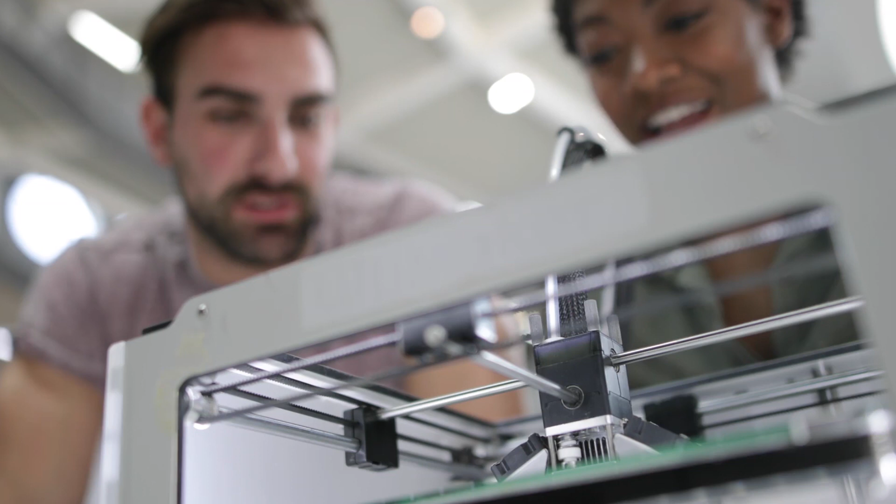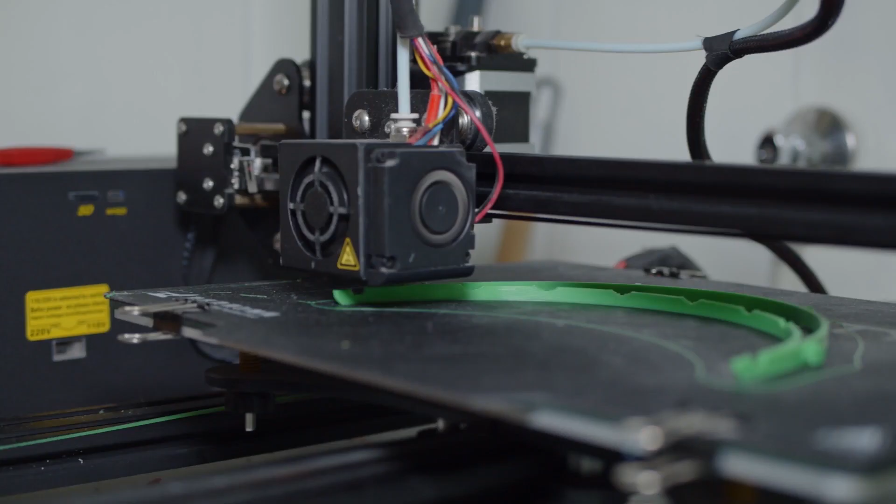Did you know that the 3D printing market was valued at a whopping $13.84 billion in 2021? The best part? It's expected to grow at a 20% compound annual growth rate. Insane, isn't it? Well, this presents a plausible business opportunity for you, an opportunity that can change your life.

Want to know the secret 3D printing business idea that will bring you money in no time? Well, get ready, because today we are having a look at the top 10 3D printing machine business ideas.

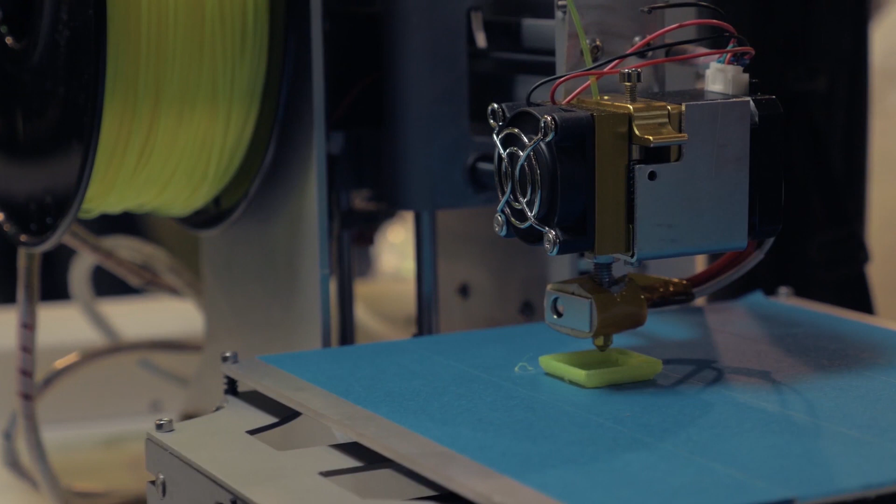Managing and keeping a business afloat in this competitive era is quite a struggle. Entrepreneurs must find unique ways of promoting and marketing their products that would set their brand apart and make a lasting impression. A great way is to use 3D printing, a technique that can help businesses develop customized products. So if you're familiar with the dynamics of 3D printing, you can offer your services to different brands for creating customizable items for their products.

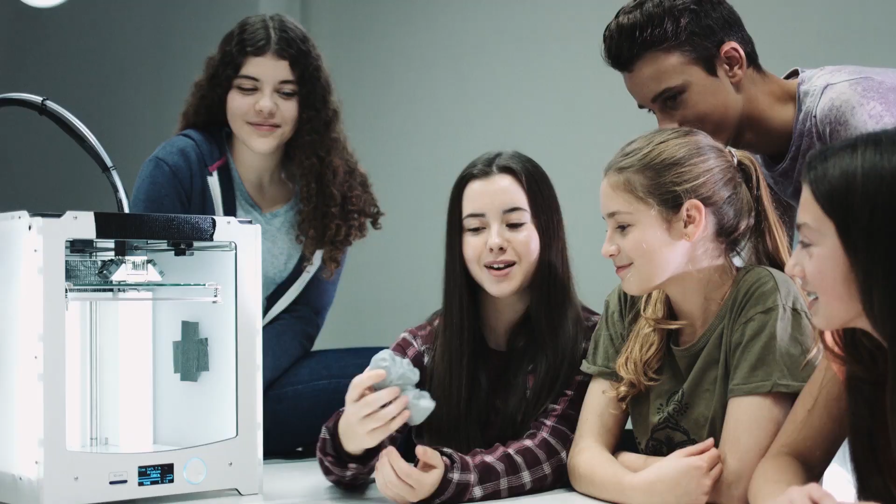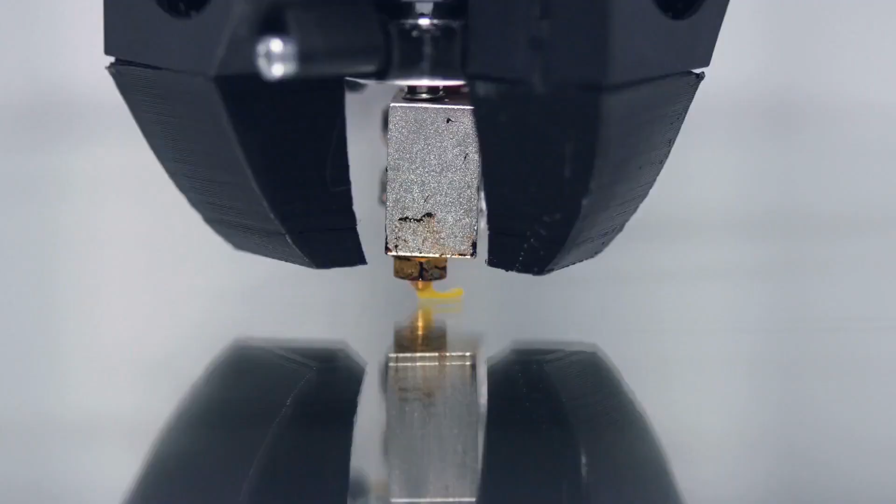To promote a brand, many companies develop corporate gifts and promotional products to be unique. 3D printing offers the freedom to customize the designs of the product as per the needs of the client, with no extra costs for molding. Similarly, 3D printing also helps in creating prototypes that would demonstrate the idea of the actual product to the customers and would help them visualize the project better.

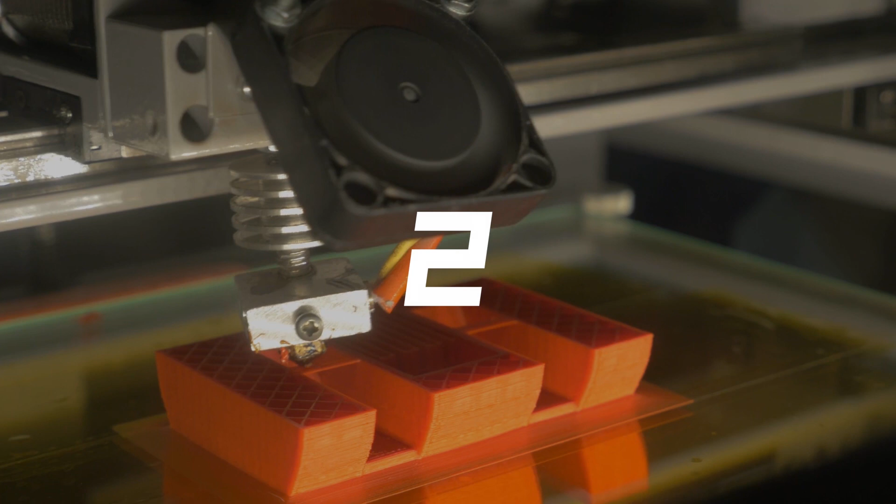Number 2. Customized 3D printing products. Customized 3D printing products involve creating and selling custom 3D printed items such as jewelry, phone cases, home decor, and more. All you need to do is choose a specific type of product that you want to specialize in. This will in turn help you narrow down your target market and create a cohesive brand.

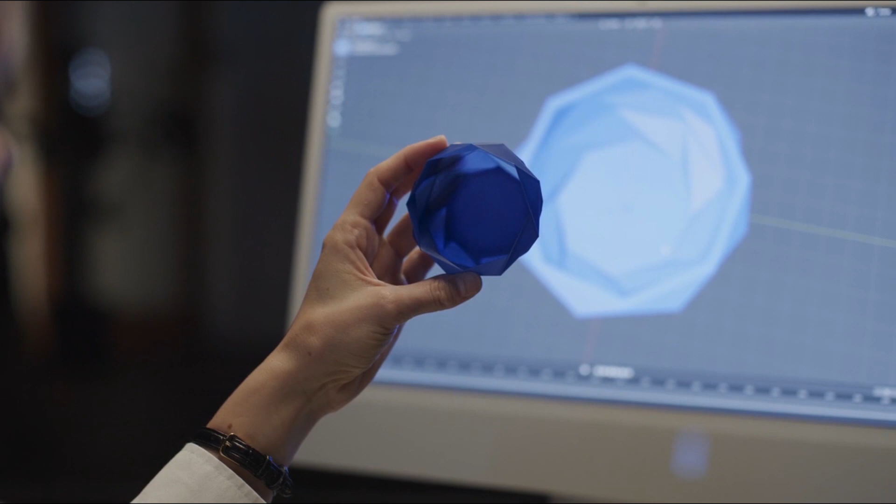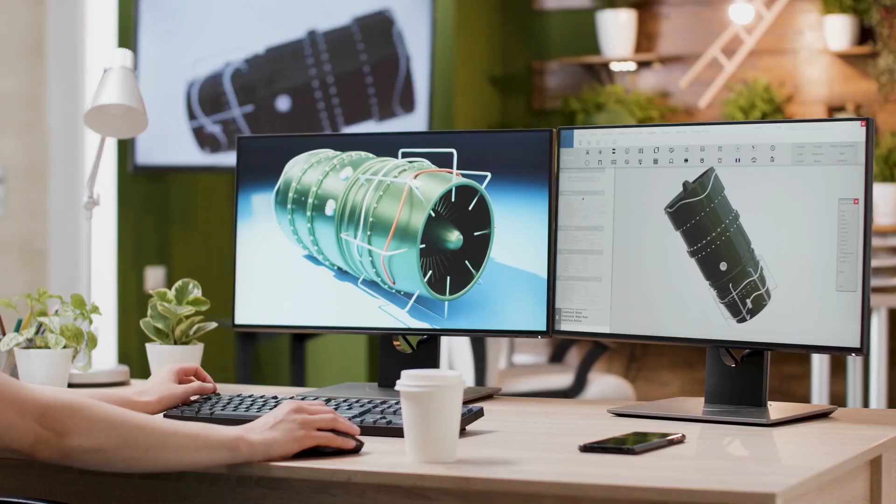You can then develop a marketing strategy to promote your products and reach potential customers. Once you have identified your product idea, it's time to design it. For this, you can use a 3D design software such as AutoCAD and then print the design with a 3D printer. What's left? Now you need to develop a platform to sell your products. One great idea is to set up an e-commerce website and reach a wider audience through online sales.

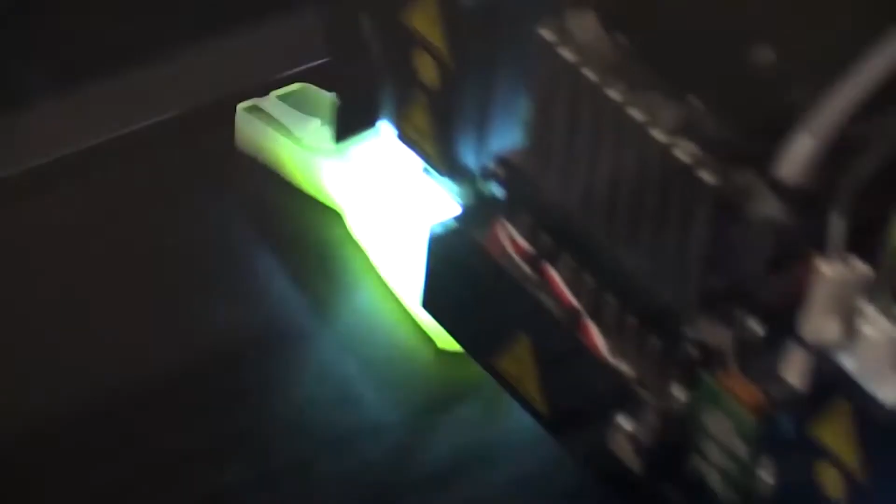Number 3. 3D printed medical models. 3D printed medical models are physical representations of organs, body parts, and other anatomical structures used for educational and training purposes. Indeed, this can be a huge niche market for you.

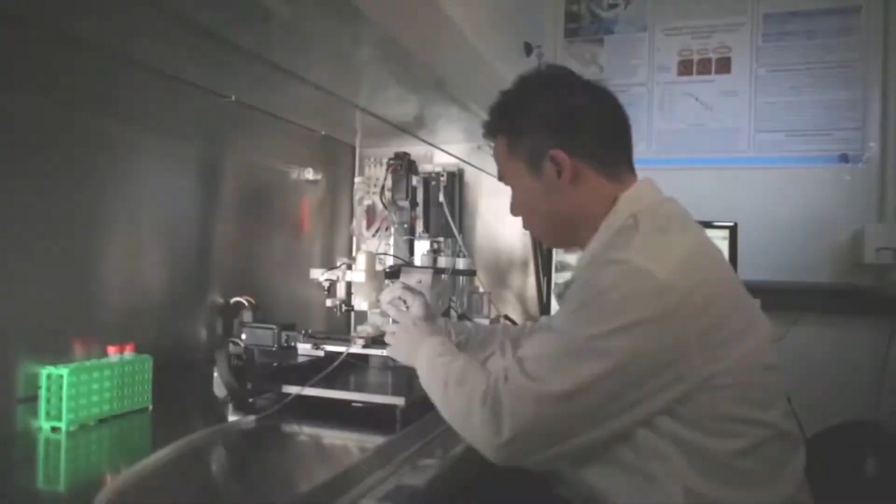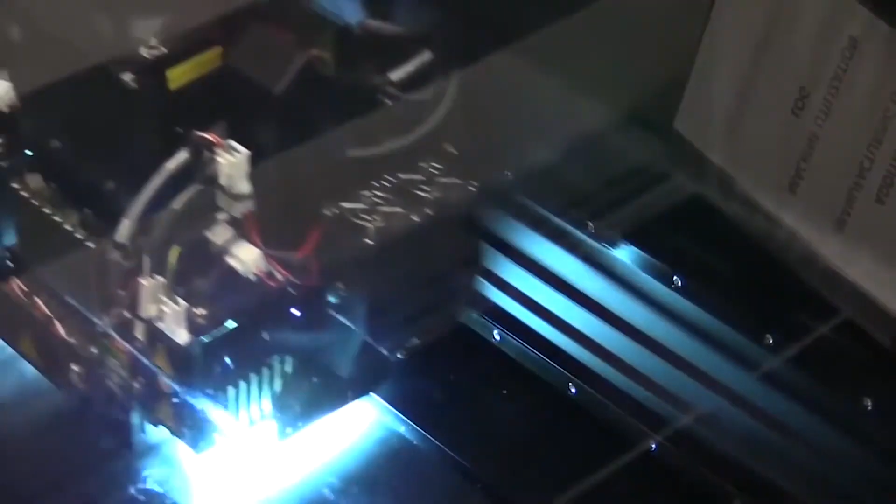To start off, you will need to research and understand the anatomy and structure of the body parts you want to print. Moving on, you can design models using software, and once created, the 3D printer will take care of the rest. To sell these printed medical models, you could reach out to medical schools, hospitals, and other healthcare organizations and offer your products for sale. Another great way is to set up an online store to sell the models directly to customers.

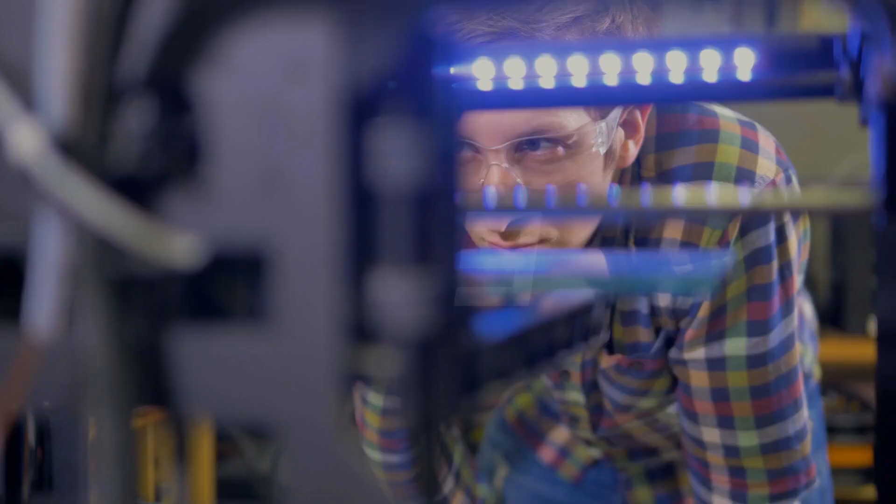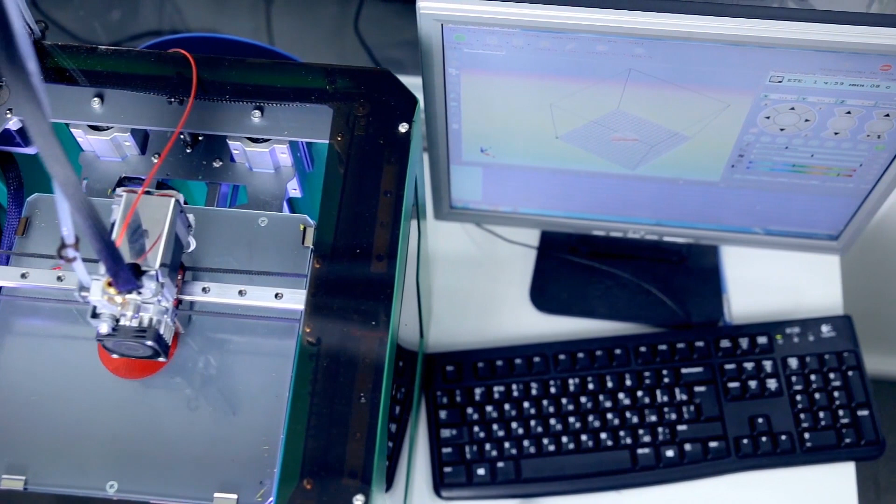Number 4. 3D printed costumes and prop designs. Props and costumes? Who doesn't love using them to click Instagram-worthy pictures? Theater, film producers, photography agencies, and cosplay characters—there's a huge market for such products. If you have hands-on experience with 3D printing, you can penetrate this market.

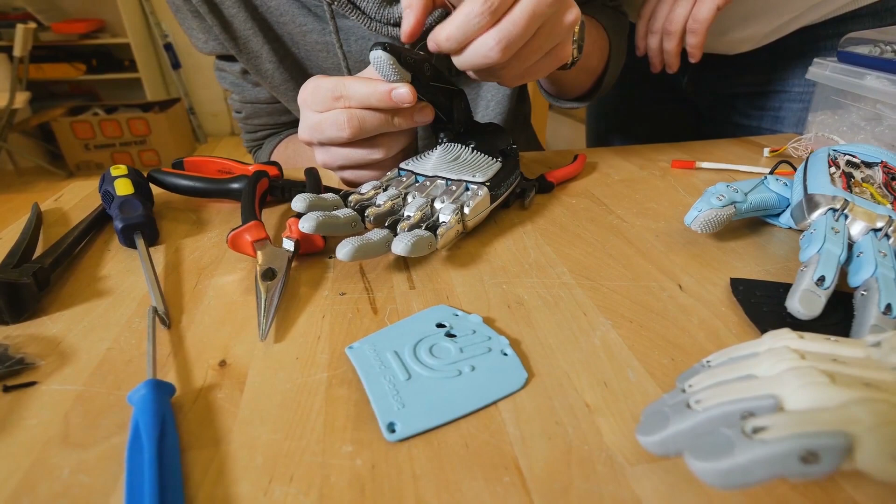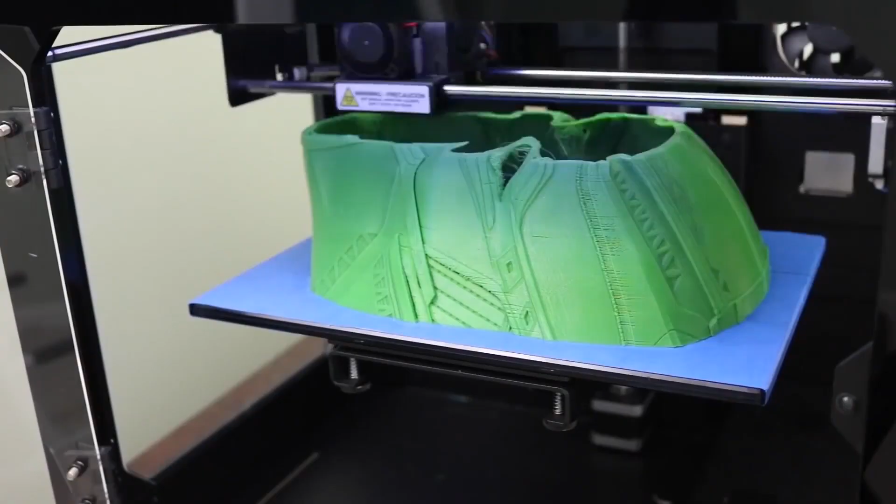But first, you need to find a niche. Determine the types of costumes and prop designs you want to specialize in, be it historical costumes, superhero costumes, or movie props. Once decided, create a digital model of your costume or prop using 3D design software. This can be a complex process, and you may need to experiment with different design techniques to get the desired result. Once the digital model is created, use your 3D printer to print copies of the costume.

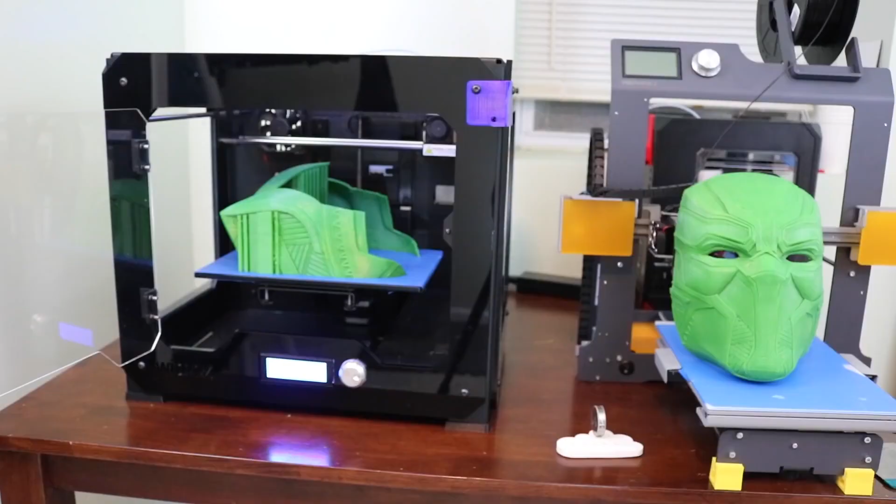This can take several hours or days depending on the size and complexity of the print. Now what? Collaborate with agencies and offer your products, or create an online presence to sell your lovely props to witty customers.

Number 5. 3D printed replacement parts. 3D printing is a huge business with massive untapped potential. You can even create replacement parts of existing products using the power of 3D printing tech. From household appliances to electronics, 3D printing can help with anything.

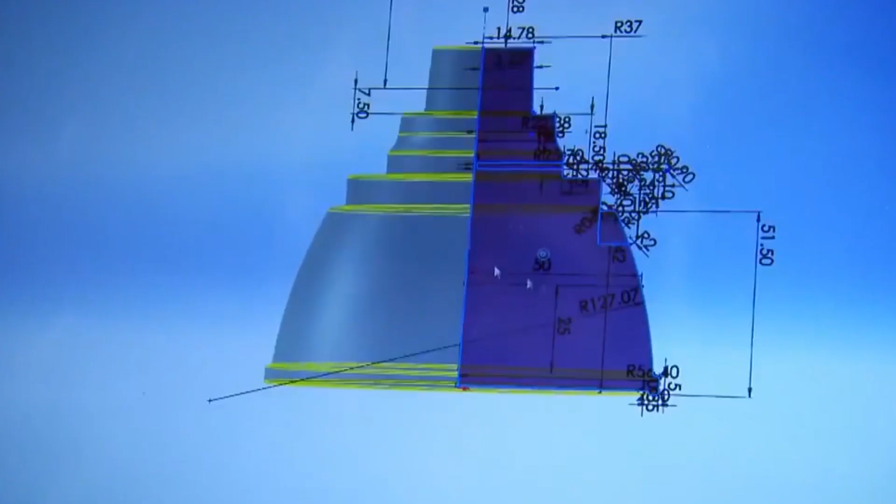The best part? 3D printed replacement parts can be produced on demand, which means that you do not have to maintain a large inventory. 3D printed replacement parts can also be customized to fit specific products or meet specialized requirements. For instance, 3D printing can produce a replacement part of a unique shape or size, which is otherwise not possible through traditional manufacturing.

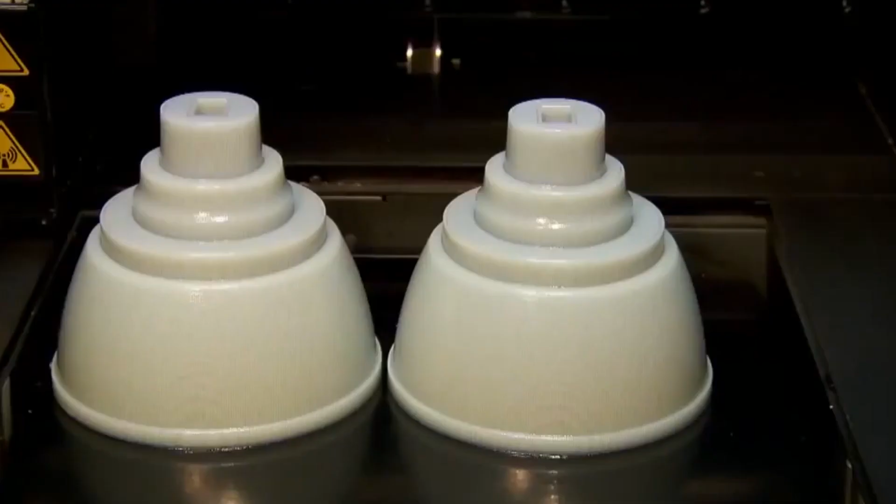Number 6. Customized 3D printed jewelry.

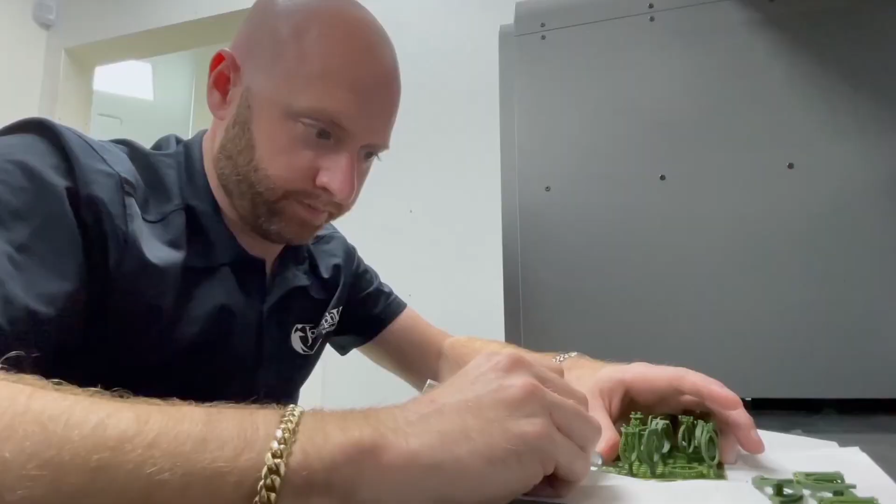Yes, 3D printing technology can help you enter the booming fashion industry. 3D printing technology has made it possible to create intricate and highly detailed pieces of jewelry that would be difficult or impossible to manufacture using traditional methods.

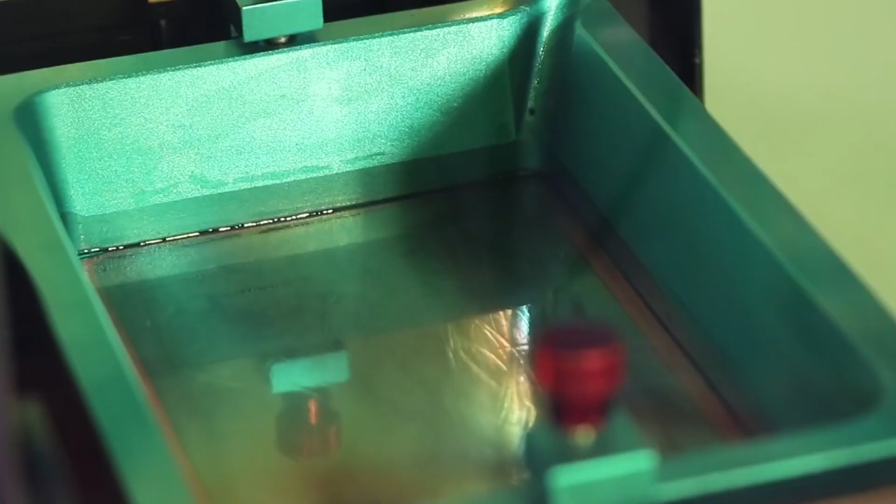To create 3D printed jewelry, a designer will first create a digital design using software. This model is then sliced into thin layers and fed into a 3D printer, which uses a variety of materials such as plastic, metal, or resin to build the piece layer by layer.

Moreover, 3D printed jewelry can be customized in a wide variety of styles, shapes, and designs to fit a customer's specific preferences. Additionally, it is also often more affordable than traditional jewelry, as it requires fewer labor-intensive manufacturing processes.

Number 7. Customized kitchenware. It's time to target those who love cooking. 3D printing has also enabled the production of kitchenware essentials of almost any material type, be it plastic to metal. It's totally customizable and can be made to one's preference and specific needs. So, if a culinary chef requires a custom knife or utensil design, it's now possible, all thanks to 3D printing.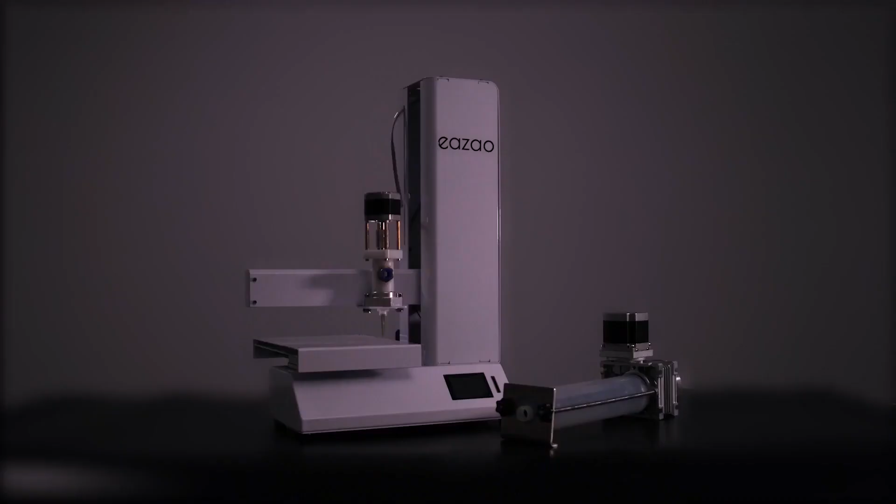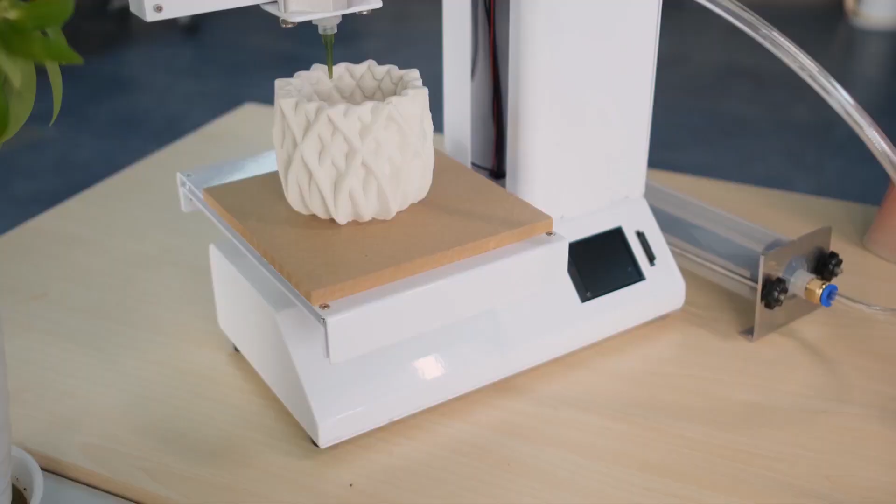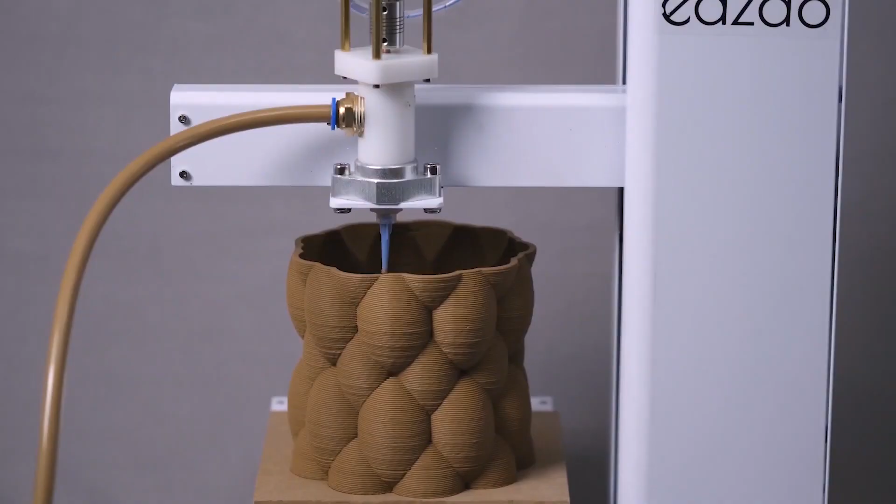3D printed kitchenware has the potential to be more efficient and sustainable than traditional manufacturing methods as it reduces waste. However, customized 3D printing kitchenware is still a relatively new technology and is not yet widely available. It is also currently more expensive than traditional methods of manufacturing kitchenware, and there are still a number of technical challenges that need to be overcome before it can be widely adopted. But in times to come, we can expect this to grow and become a profitable niche.

Number 8. 3D printed home decor. Every homeowner yearns to decorate and bring out the best possible design of their home. With 3D printing, a lot of homeowners' wishes can be fulfilled. You guessed it right. 3D printing can now develop a wide variety of home decor items, including wall art, vases, planters, and more. These products can be made in a range of styles and designs, from modern and minimalist to traditional vintage designs.

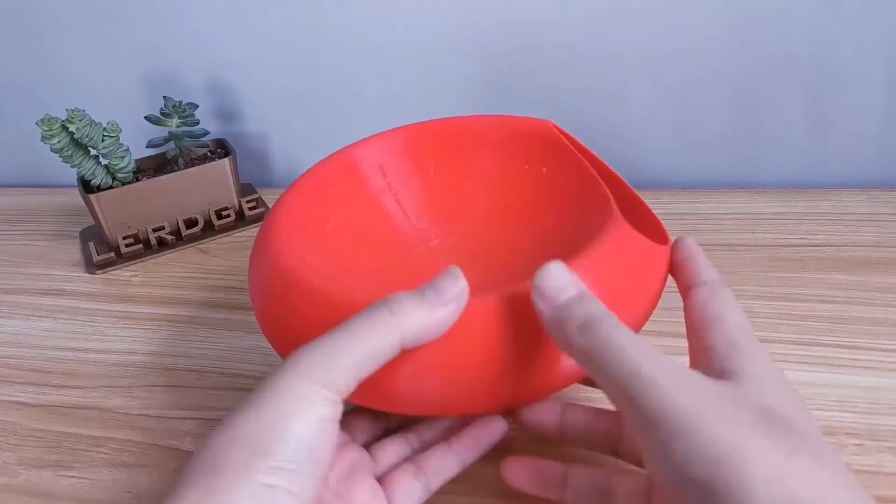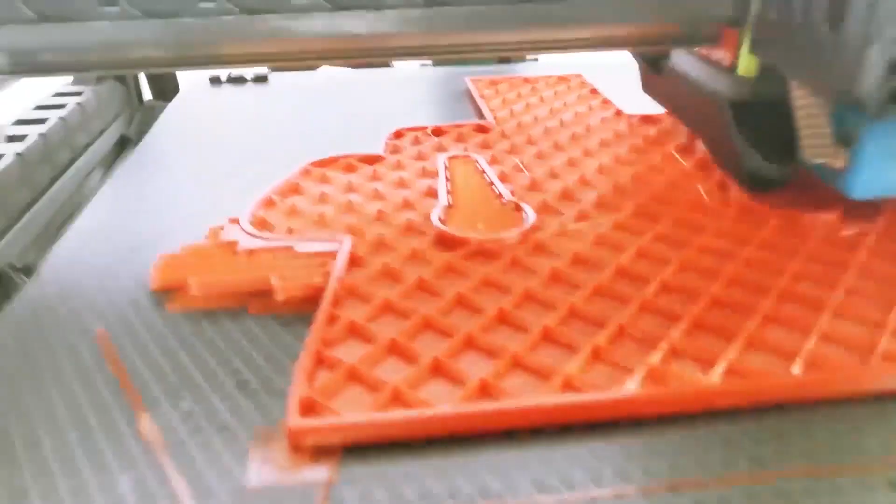Some potential benefits of using 3D printing for home decor include the ability to create customized pieces that are tailored to customer-specific preferences, and the option to use a wide range of materials, including plastic, metal, and even wood or stone-like composites.

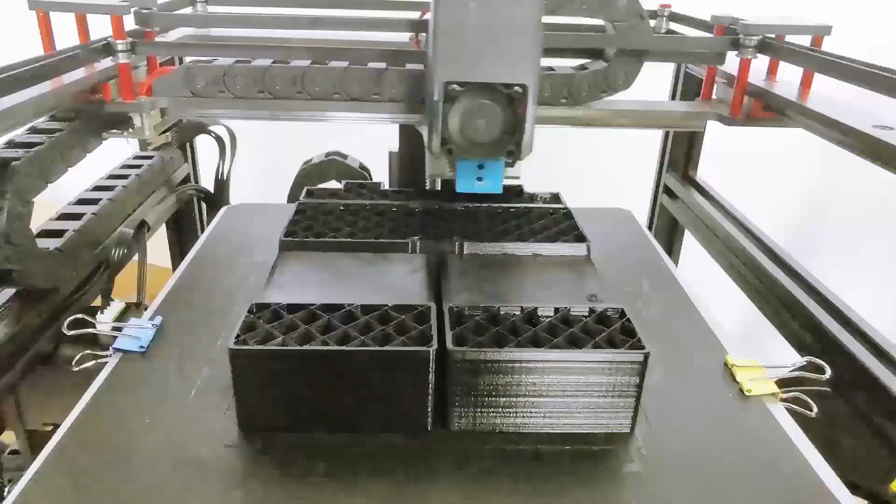3D printed home decor items can also be more sustainable than traditionally manufactured products, as they can be made using less material and energy, and can be easier to recycle or repurpose at the end of their life.

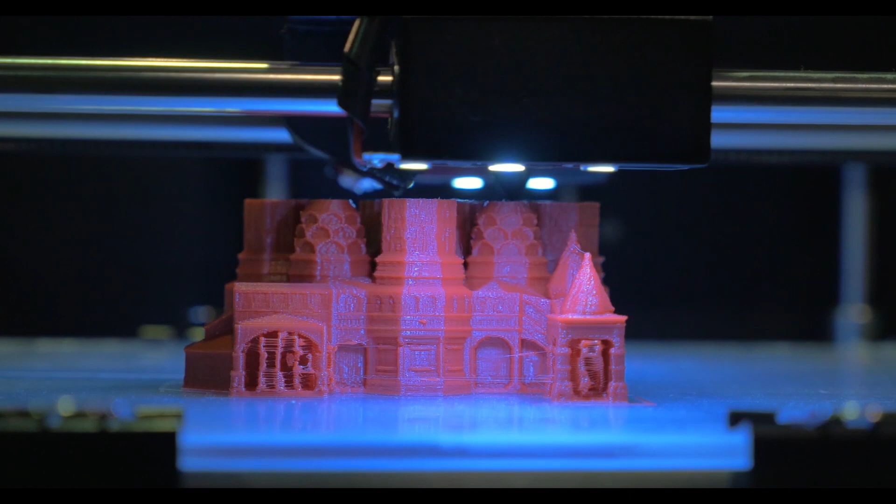Number 9. 3D printing workshops or classes. Since the 3D printing field is booming, there can be a lot of aspirants who want to jump on the bandwagon. Well, you can become a mentor for such enthusiastic individuals.

One way to start teaching with a 3D printer is to offer workshops or classes on how to use 3D printing technology. These classes could be geared towards people with a variety of backgrounds and experience levels and could cover topics such as setting up and using a 3D printer, creating and modifying 3D models, and troubleshooting common issues.

You could also consider offering specialized classes on various applications of 3D printing, such as creating prototypes, manufacturing small runs of products, or using 3D printing for home decor or fashion.

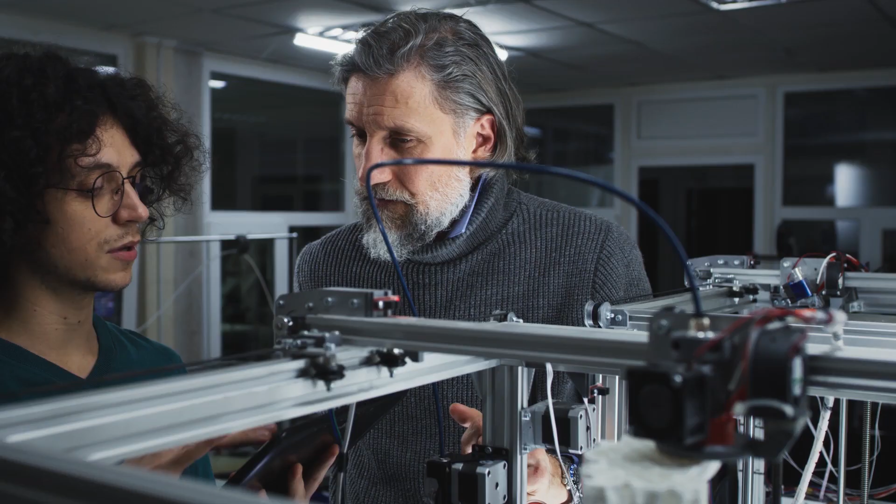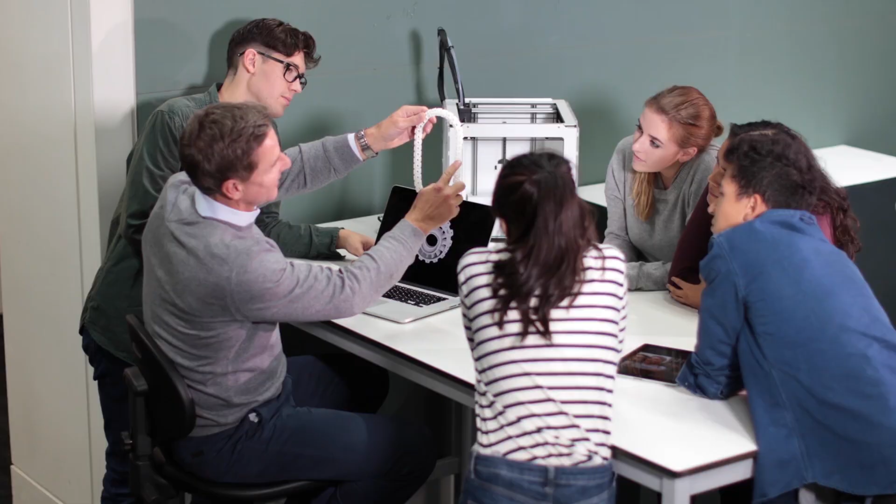To start teaching with a 3D printer, you will need to have a good understanding of the technology yourself, as well as the ability to communicate complex concepts in an easy-to-understand way. You will also need to have access to a 3D printer and the necessary software and materials. And to develop authority in the field, it would be best if you have relevant certifications or credentials.

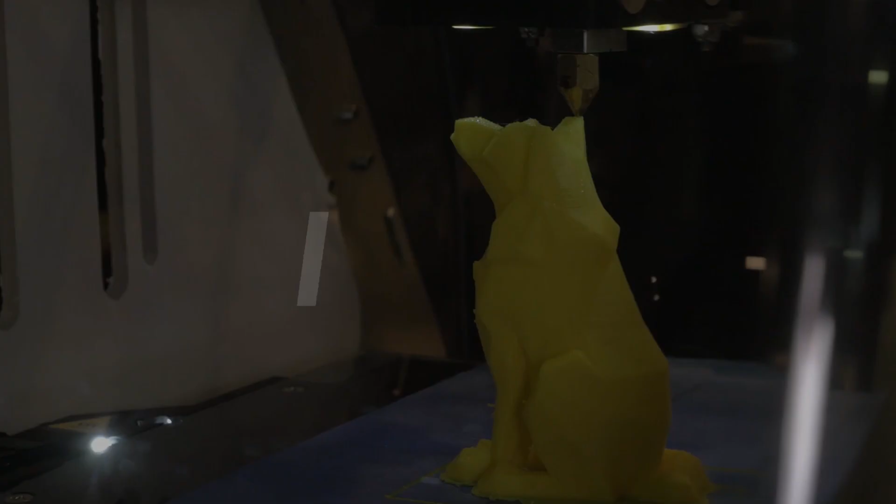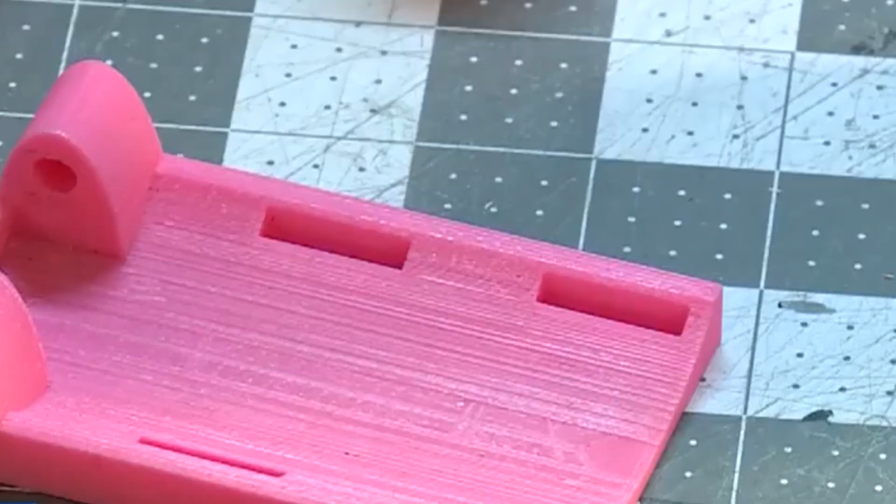Number 10. Custom 3D printed prosthetics for animals. The last business idea is quite a unique yet profitable one: animal prosthetics. You see, many animals such as dogs and horses are often in need of prosthetics due to accidents or birth defects, but these can be expensive and difficult to obtain.

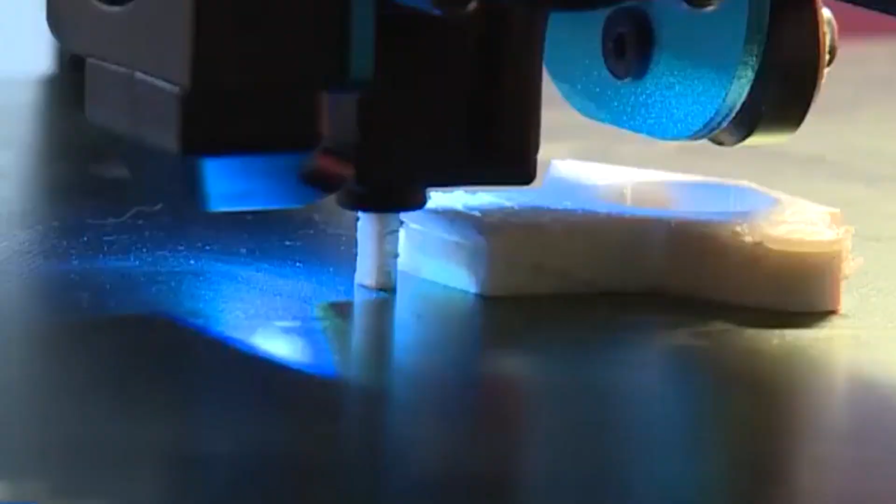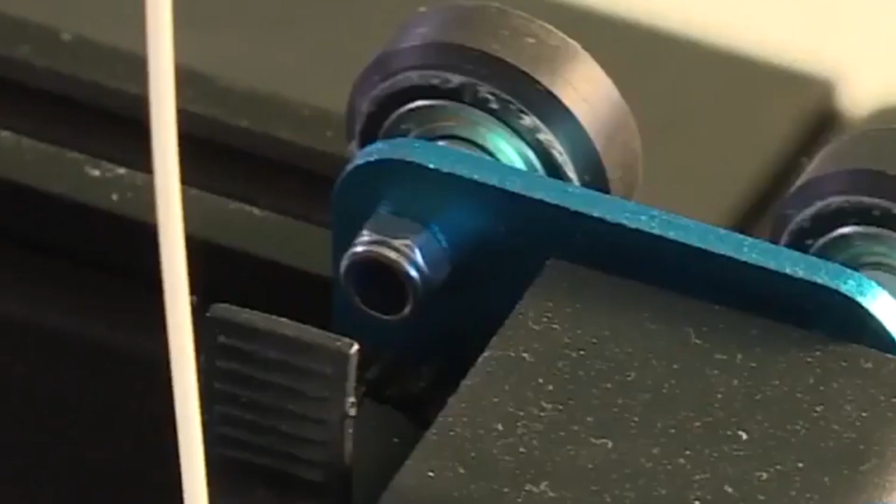This is where 3D printing comes in. By using 3D printing technology, you could create custom prosthetics at a lower cost and with a quicker turnaround time. You could work with veterinarians and pet owners to design and print prosthetics that fit the specific needs of each animal. This business could also potentially expand to include creating prosthetics for humans in need as well.

So there you have it. Do any of these business ideas sound good to you?